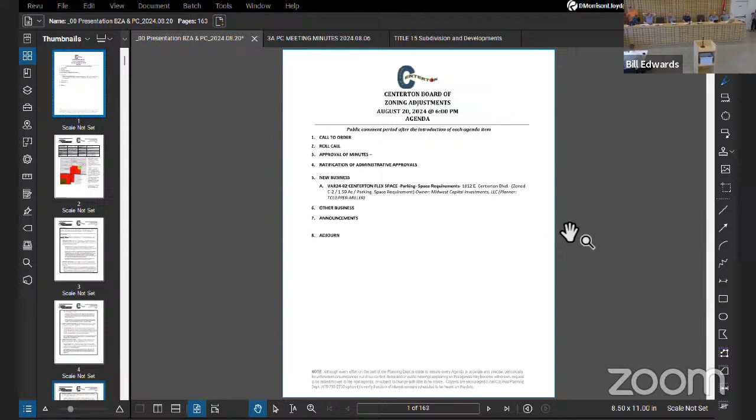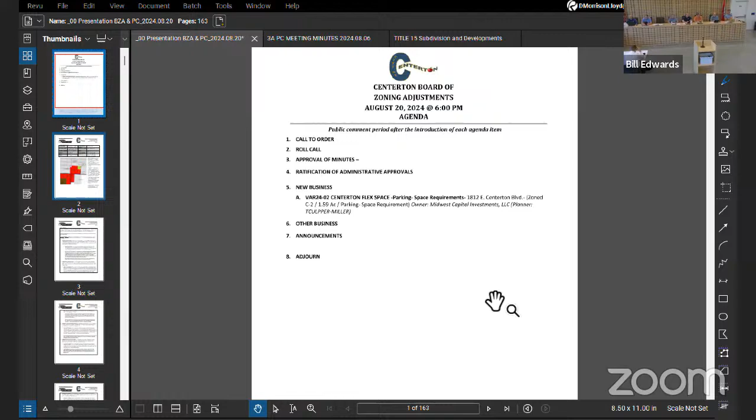All right, first thing on the agenda is a variance, 2402, for the Centerton Flex Space Parking Space Requirements at 1812 East Centerton Boulevard. It is zoned C2, 1.59 acres. Is the applicant here to give us an overview of what you're requesting?

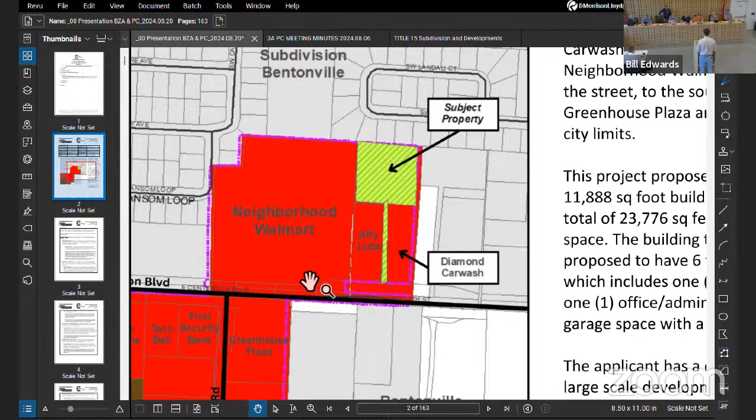It has several smaller units of about 2,000 square feet to be put out towards contractors and other small businesses. So the intended use is more of small contractors, be it HVAC people, pest control, those types of things, where they have a small space to store things and pick up materials and head out to the job site. So that's more of our intended use. The east side building has the smaller subdivided units of about 2,000 square feet each, and the western building is just a shell that's a little under 12,000 square feet.

So what we're requesting is a parking variance to reduce the amount of parking. The code has two different parking calculations: one of which is one space for every two employees, and the other calculation is one space per 500 square feet of building, and it says whichever is greater. So our request is for the lesser calculation there.

If we calculate the buildings, it would need about 48 parking spaces for the greater requirement. We're providing 36 spaces on the exterior. These buildings also have roll-up doors for a garage space inside the building. If we're able to count those roll-up doors with the spaces inside the building, that provides an additional 12 spots, which gets us to the 48 on the larger calculation. So that's what we're requesting: either count the interior parking spaces, which gets us to the higher count of 48, or let us go with the lesser count for the one space per every 2 employees.

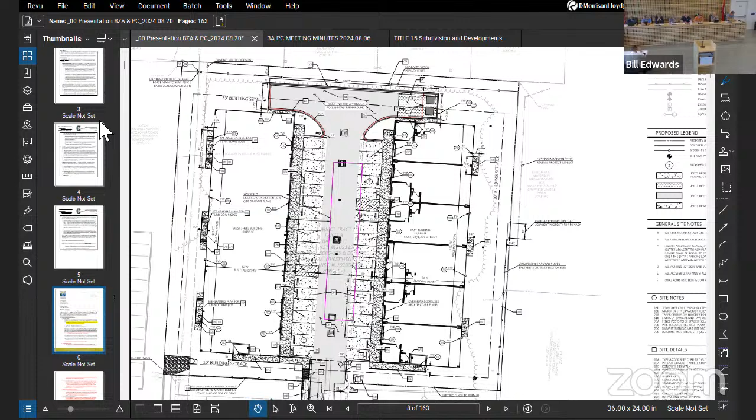This project proposes two 11,888 square foot buildings for a total of 23,776 square feet of flex space. The building to the east is proposed to have 6 tenant spaces, which includes 1 bathroom, 1 office space/admin space, and a garage space with a bay door.

The building to the west is currently just a shell with 6 bay doors and is being built out for the tenants. The applicant has a concurrent large-scale development application, Development 2403, that is pending approval contingent on the approval of the parking reduction variance. They are requesting a reduction of 12 parking spaces from the required 48, down to 36.

Would you like me to go over the findings or do that after public? I'll cover the findings. Any questions or comments from any of the commissioners before we open it up to the public?

I would then entertain a motion to open the public hearing. Mr. Jerry: I make a motion to open public hearing. Second. Motion to open the public hearing. Is anyone opposed? We are now open to the public.

If anyone wishes to speak, have any questions, comments, concerns in regards to the variance request for a reduction of parking spaces at 1812 East Centerton Boulevard, we ask that you come to the podium, state your name and address, and any questions, comments, or concerns.

Second call for anyone who wishes to speak. And third and final call. This is Joey, I'll make a motion to close the public hearing. Motion to close the public hearing and a second. Is anyone opposed?

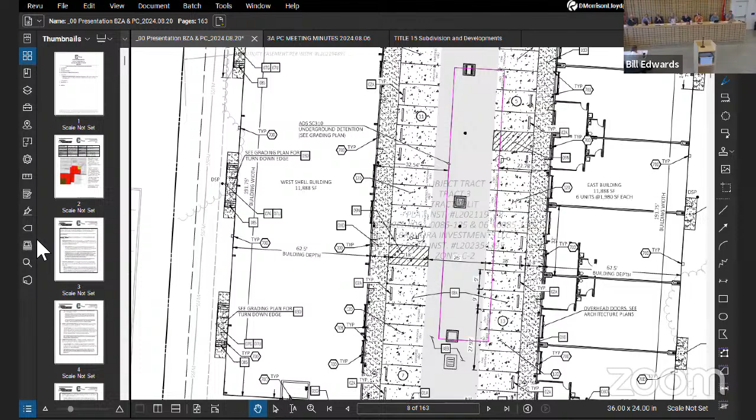Any questions or comments before we go through the fact finding things we need to consider? The first one is preservation of intent: that the variance, if granted, is consistent with the purpose and intent of the regulations for the district in which development is located. No variance shall have the effect of permitting a use in any district that is not a stated permitted use, accessory use, or conditional use of that particular district.

The applicant's response: the variance meets and exceeds the lesser of the two parking requirements in the warehousing and wholesaling parking section. In addition, the buildings have 6 roll-up doors each, which can provide an additional 12 interior parking spaces for vehicles to meet the 48 space requirement of 1 space per 500 square feet.

The staff findings: the intent of the C2 zoning district is to allow for appropriate parking for highway commercial uses. Flex space is typically used for warehousing and wholesaling, and Centerton code requires at least 1 parking space for every 500 square feet of floor area, or 1 for each 2 employees, whichever is greater. Centerton code for retail uses requires 1 space per 200 square feet. Due to this being zoned C2, a retail type business could locate in this development.

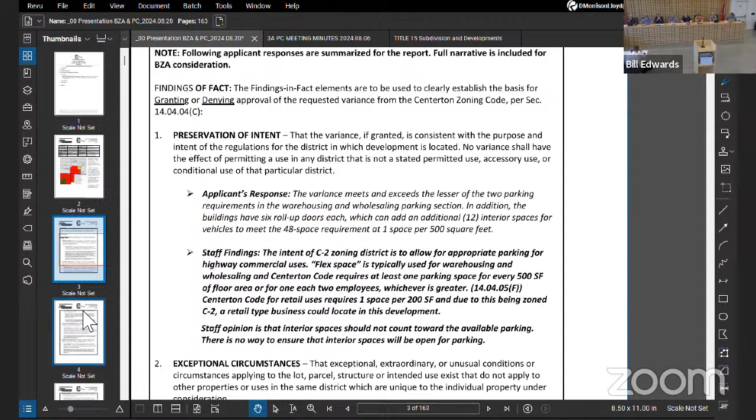So what's the requirement for that code based on their layout, and what's the requirement for the 200? How many parking stalls do they need to meet each code? Is that on here? Yeah, the one per 500 square feet is 48 parking spaces. Okay, then the lesser is the 36.

The one per 2, is that asking about the retail? We have no idea how many employees. Right, so it's based on square footage. And that's 36.

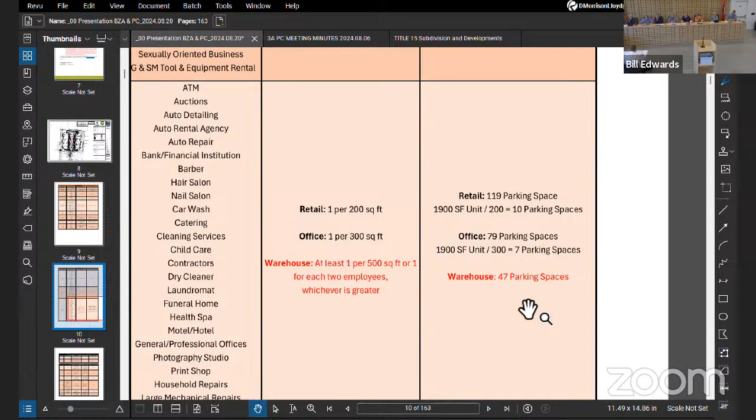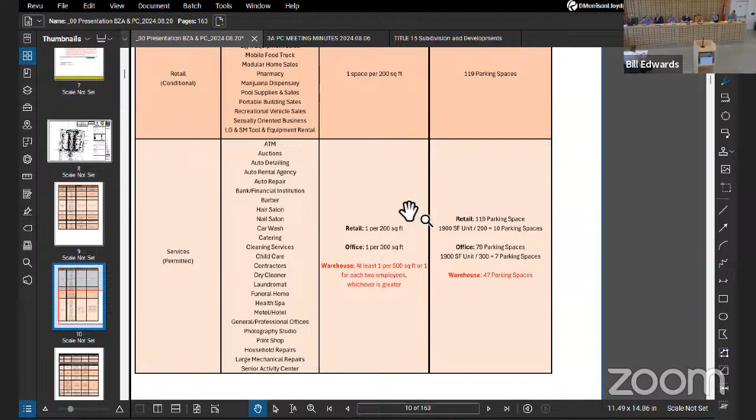That's what we've done on other flex space. On some, we've looked at even where they already have office space identified. So we've done one per 300 on that space, then one per 500 on the warehouse space. And Tara's gone through and created a list so you can see those uses.

That's what we considered when we were looking at the findings. Well, their response says they exceed the lesser of the two. But the code says you have to do the greater. There's no lesser. This is what they're asking. Well, they're asking for the lesser of, but the code states the greater.

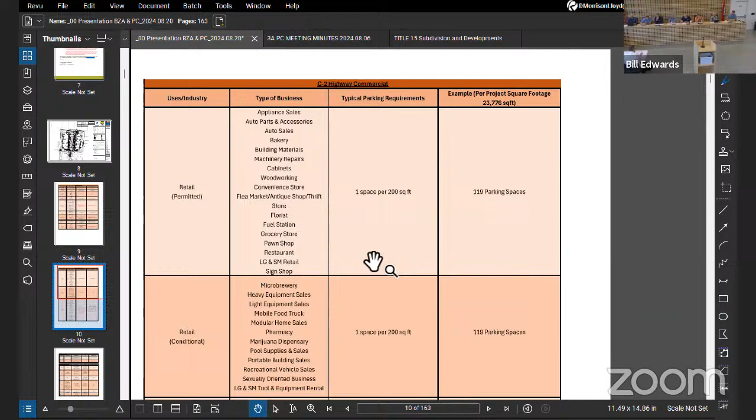Or if the interior spaces could be counted toward that amount. Okay, but they're not sprinklered, right?

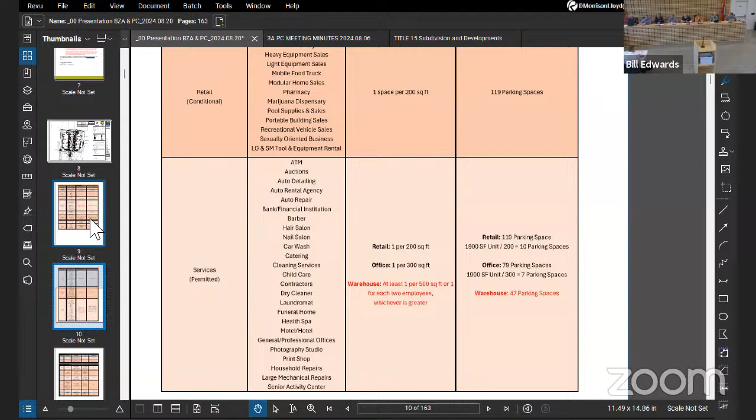It's zone C2. Have there been any other conditions put on it as far as what it is limited to? Because they're asking for flex space, but with that, would they be allowed to do what is permitted in C2 at any time? Any conditional use they would want in there, they would have to come and request that through a conditional use permit.

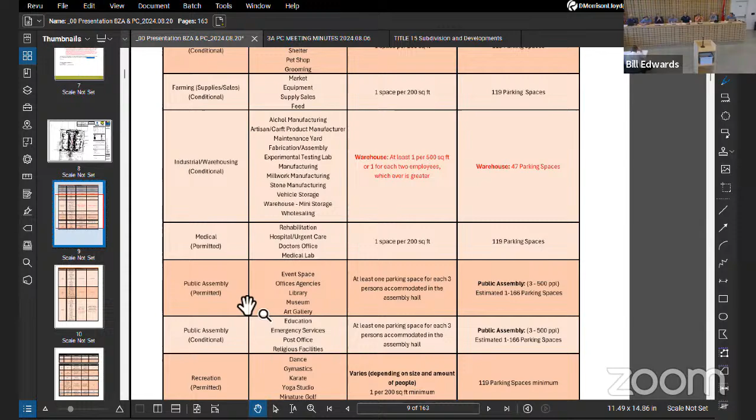So that's why those are broken out. You can see the permitted uses, and those would be allowed without question. They would not have to come back to us to do those, but they would have to meet fire code, building code, and so forth when they built them out for that specific purpose.

Tara went through and put everything on there, but I did pull out a few things, like a golf course or an airport, things that clearly they wouldn't be using them for.

There may be some other things on here that wouldn't be applicable, but would they be able to talk to the neighbors about a shared parking agreement?

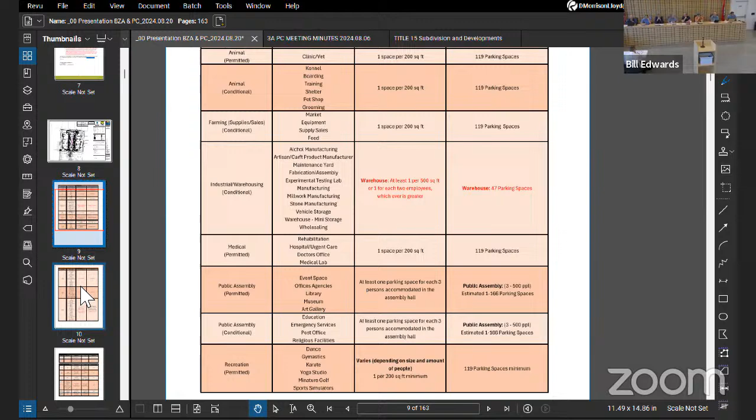There is not, but there's the car wash. Right, probably not a lot of opportunity there. They really don't have any spare capacity.

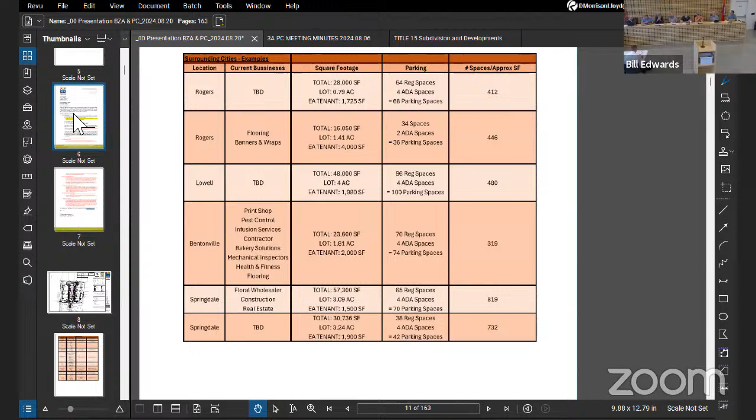What are your thoughts around allowing the inside parking? Maybe we'll start there. I don't see that, because the building had to be open for somebody to go in and out. The doors couldn't be locked in order for them to use that parking.

I think if you look at all the uses permitted in C2, there may come a time where indoor parking is not part of that use. I don't think so either. And now you've taken away that parking spot, but you're still allowed by code to use it as something else inside there.

But technically it's all to code. That doesn't mean at that point, because they had a variance. No, but I'm saying there's nothing stopping them from using the interior space as a parking space. No.

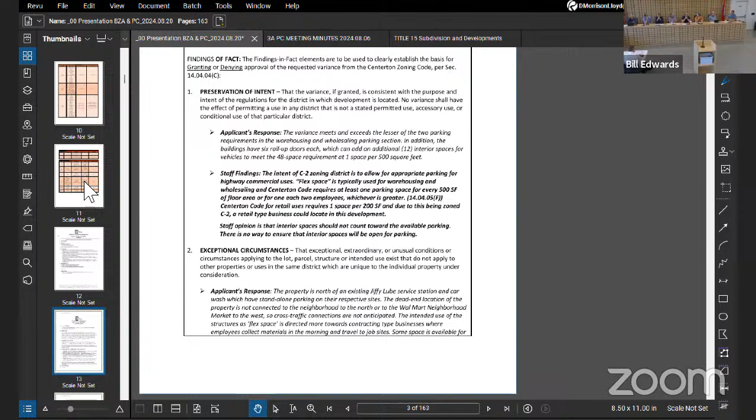How do you police that? I mean, if you don't sprinkler it and somebody comes in and wants to start putting commercial vehicles in there, you're not suddenly going to go out and sprinkler it, or come here and tell the fire department, hey, FYI. I mean, how do you police it?

You can get their certificate. I'm just thinking for safety purposes, and we have other businesses right next to it. Yeah, and I always have to remind us, our job's not to be the police, but you have to think about it. I think their intent is more around regular vehicles because of the regulation of the numbers.

So I think they're really talking more about just everyday use. Do we want to allow them to count? That's what I think we need to consider, more than getting into the technical details, do we want to allow them to use it? We want to allow them to count 12 spaces. I don't think so. If it's a warehouse use, then you're not going to fill up a warehouse with a truck.

I think what we need to think about is if they fill the others up with businesses that would require more than the 36 parking spaces, then according to the code, those people wouldn't have any place to park necessarily.

That's what we're saying we need to think about. Turn that into a gym, which you could under C2. 30 parking spots for a gym ain't gonna work.

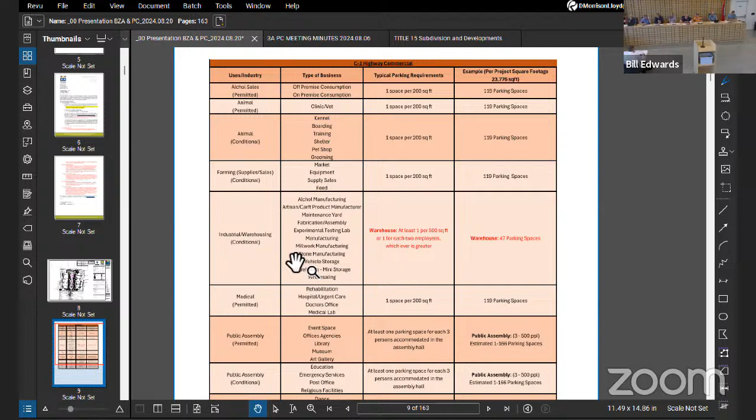That's question 3. We're gonna get there in a second, Tony, we're gonna get there in a second.

I'm not a fan of allowing the indoors to count towards their numbers.

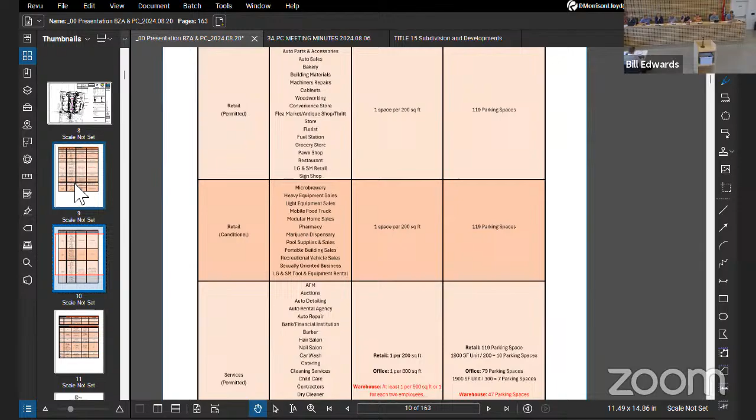In the preservation of intent, I guess we don't normally talk about parking spaces. I was just reading back through it to figure out if we can make any real use out of it, and it's a little difficult on parking, in my opinion as well. I think we can have that discussion, we can talk about it.

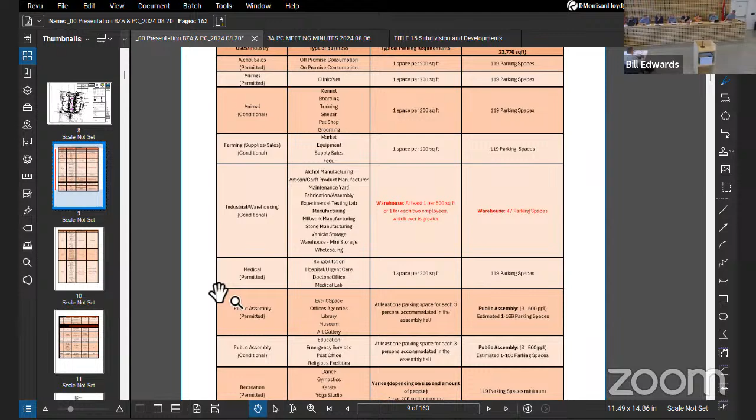I think we're gonna get into a little bit more, but I think our biggest thing is to decide whether we want to allow them to use the 2 or the 12 inside. I think I heard a majority say no.

So I don't think there's a proven point here with the preservation of intent, trying to do something other than the required parking spaces. I guess is the way that I would say it. Would you guys agree with that, or do you have a different opinion?

Agreed. Okay, so I'm gonna go on to the next one.

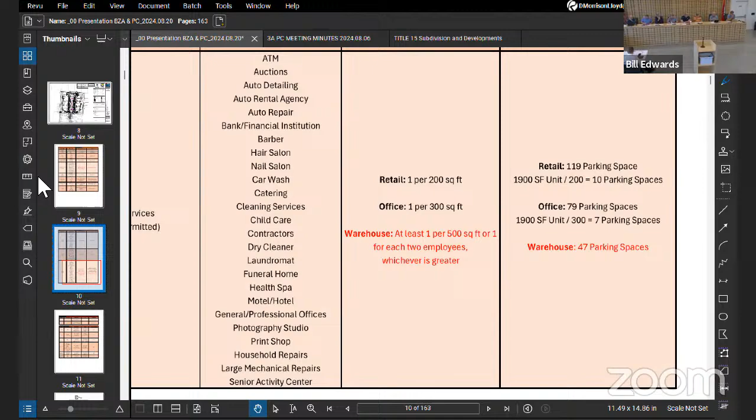Exceptional circumstances: exceptional, extraordinary, or unusual conditions or circumstances applying to the lot, parcel, structure, or intended use that do not apply to other properties or uses in the same district, which are unique to the individual property under consideration. The applicant's response: the property is north of an existing Jiffy Lube service station and car wash, which have standalone parking on their respective sites.

The dead-end location of the property is not connected to the neighborhood to the north or to the Walmart neighborhood market to the west, so cross-traffic connections are not anticipated. The intended use of the structures as flex space is directed more towards contracting type businesses where employees collect materials in the morning and travel to job sites.

Some space is available for offices and showrooms. The buildings are not anticipated to be major traffic generators, which is more typical of C2 zoning. The staff findings: without meeting the minimum requirement of 1 per 500 square feet for uses stated above, staff does not feel there will be sufficient parking for work vehicles and/or personal vehicles.

Insufficient parking would lead to people parking in grass, fire lane, and access drives. The parcel does not have an exceptional or extraordinary circumstance that would affect the intended use and parking requirements. Other developments of proposed flex space were required to meet the 1 per 500 square foot parking requirement.

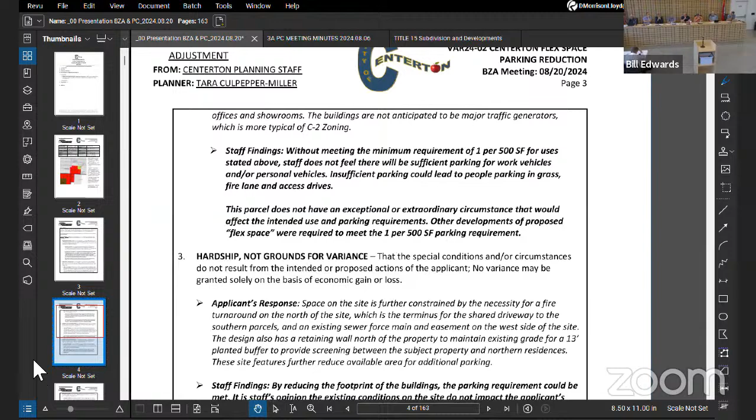I'm just looking for where warehousing really falls in the use. Is that this zoning, or is that a different zoning? Well, on flex space, we typically have considered them as warehouse type because they have the bay door, they have deliveries.

So that is the most appropriate parking. I'm talking about the zoning though. Is warehousing more industrial or commercial by our code? It is more industrial, as being allowed. But with the flex space, they are limited to the commercial use.

Gotcha. But we're taking the 500 - we know why it's 500, from the warehouse going 1 per 300 square feet. The cost of building flex space is becoming more and more popular for commercial use, not necessarily industrial use.

Especially where we live, because we don't have enough of it.

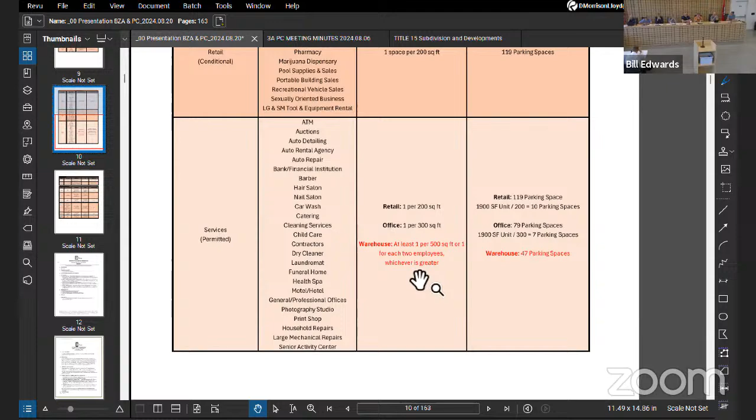We also, and Tara did prepare a table of what other cities or developments in other cities worked out to per square footage, parking spaces per square footage. Springdale was much higher on those, but Rogers, Lowell, and Bentonville are all around 300 to 500. The 36 that they're asking for is somewhere around 650, if you want to compare numbers.

I was looking at the size, I did that square footage about 10 minutes ago. I was looking at square foot size. You said about 25,000 square feet, it's 23. So I was looking at the 23 and then the 23.8, almost 24. We've all looked at that a whole lot today.

So, sorry, but I was just curious about that. I don't think there's any exceptional circumstances related to that. Agreed. Okay, I would like to add that Rogers has recently waived their parking requirements and has put it on the developer to provide enough parking for their intended use as the owner and developer. Agreed, unfortunately that's a different conversation than the variance.

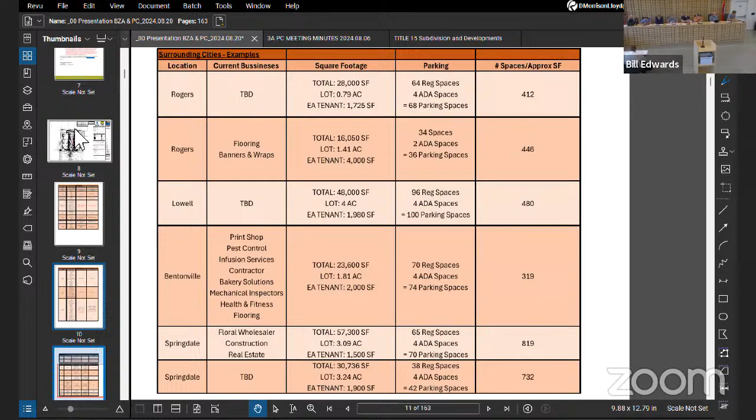The third thing to consider is hardship - not grounds for variance - that the special conditions and/or circumstances do not result from the intended or proposed actions of the applicant. No variance may be granted solely on the basis of economic gain or loss. The applicant's response: space on the site is further constrained by the necessity for a fire turnaround on the north of the site, which is the terminus for shared driveway to the southern parcels, and an existing sewer force main and easement on the west side of the site.

The design also has a retaining wall north of the property to maintain existing grade for a 13-foot planted buffer to provide screening between the subject property and the northern residences. These site features further reduce available area for additional parking. The staff findings: by reducing the footprint of the buildings, the parking requirement could be met. It's the staff's opinion the existing conditions on the site do not impact the applicant's ability to meet the parking requirements.

This is probably another one of those where I would agree with staff as well, but I will open it up for you guys for discussion. Yeah, I didn't see on the drawing where the design was limited - it couldn't be adjusted so far as square foot size. There's an existing utility easement here, the force main, you could park over that, but you're picking up 2 spots extending that hammerhead. That's not gonna get you close. And then back here is a retaining wall and a privacy fence, and they have drainage here.

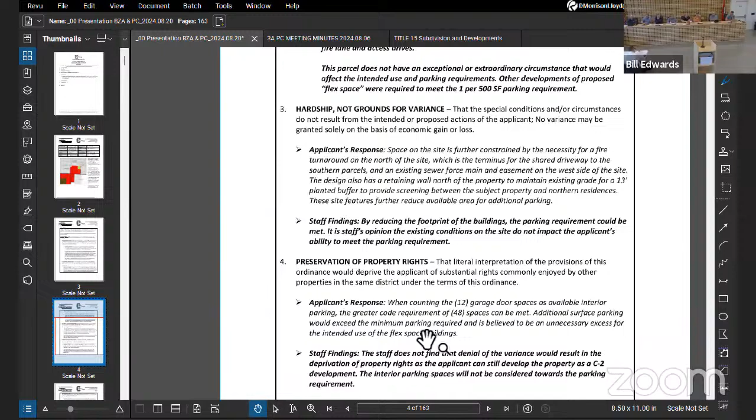Preservation of property rights: that literal interpretation of the provisions of this ordinance would deprive the applicant of substantial rights commonly enjoyed by other properties in the same district under the terms of this ordinance. The applicant's response: when counting the 12 garage door spaces as available interior parking, the greater code requirement of 48 spaces can be met. Additional surface parking would exceed the minimum parking required and is believed to be an unnecessary excess for the intended use of flex space buildings. The staff findings: the staff does not find that denial of this variance would result in the deprivation of property rights, as the applicant can still develop the property as a C2 development. The interior parking spaces will not be considered toward the parking requirement.

And again, I would lean towards staff's findings here, but open it up to the commissioners for any additional discussion or disagreement. But I mean, it sounds like we've asked for 500 on everything. Yep.

The last thing for us to consider is the absence of detriment - that granting the variance requested will not create substantial detriment to adjacent property or that will materially impair or be contrary to the purpose and spirit of the chapter or the public interest.

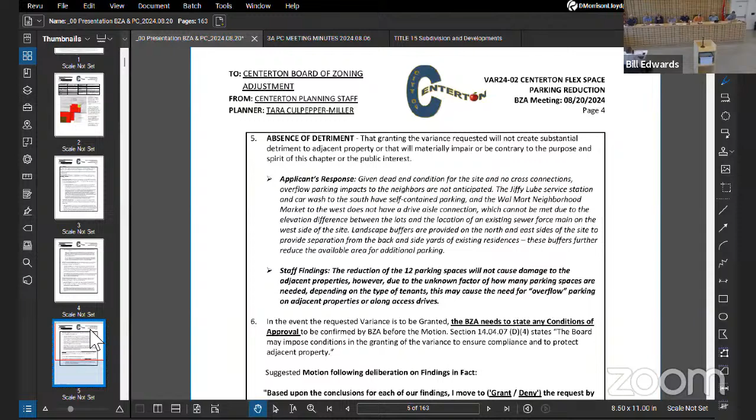And we'll have another meeting next time just to go through the minutes. And I would entertain a motion to adjourn the Board of Zoning Adjustments.

Joey, I'll make a motion to close the meeting for the August 2024 Centerton Board of Zoning Adjustment. Motion and a second. Is anyone opposed? All right.

Next is the Centerton Planning Commission for August 20th, 2024, and I will call that to order with a roll call. Brandon Swoboda, here. Ben Lewis. Tony Davis. Ron Sessoms. Harry Harris. Rick Inkler, here. Kevin Murphy, here. Joey Engel, here. Jeff Safer, here as well.

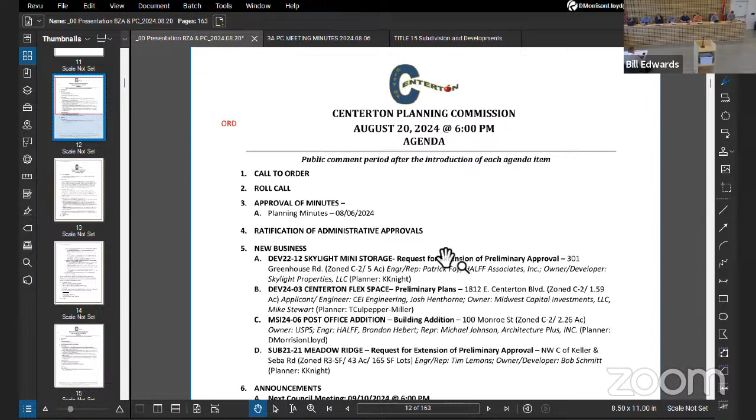First thing on the agenda this evening is the approval of the minutes from our meeting of 8/6/2024. On a motion to approve the minutes from 8/6/24. Second. Motion and a second. Is anyone opposed?

All right, no admin approvals this time. First thing under new business is the development 2212 Skylight Mini Storage request for extension of their preliminary approval. It is 301 Greenhouse Road. It is zoned C2, and it's 5 acres. Applicant, give us a quick rundown of what happened and what you're requesting.

Yes, sir. Patrick Floyd with HALFF Associates. I'm here on behalf of Skylight Storage. This was approved right around a year ago, right around ending the first sewer moratorium, which caused some delays. Whenever that got released from the health department, we got that approval. The client went to get the financials in order and it wasn't making sense yet. So since then, he's finally got it ready to move forward. He's got S&K on board. We didn't need to ask this extension before, so before you guys now for that extension, 6 months, I believe that gives us time to do grading permits and gets to construction.

Caleb, would you want to give us a staff overview? Yes, so this parcel does have a conditional use for storage.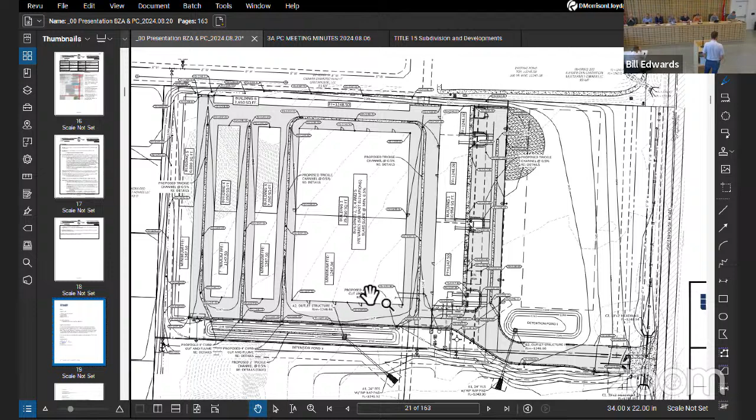However, no construction has taken place on site since that meeting was held. They haven't submitted a grading permit or had their P&P inspections to begin work on site. The developer has stated that construction has not begun due to a scheduling conflict with the contractor. They are requesting a 6-month extension for preliminary approval.

I'm happy to go back through the details of the project if you guys need a refresher. Shouldn't be anything new that we would need to reconsider on this. No, they're meeting everything. Their adjacent street agreement is signed in the packet. So this one was good to go. They just didn't start construction.

Grading permit constitutes as starting construction, right? No, not here. We have a subdivision that has a grading permit and it's not even, it is just now finishing up addressing comments from staff. But if they haven't approved large scale and pull a grading permit, that doesn't constitute as starting construction? They have to have a pre-con and be released.

Do they need another pre-con? Nothing is changing on their IFC, so I would imagine no. It all depends how much longer it's gonna be till they start and if there's any changes. Okay, kind of how we make it. Sounds like talk to Rain before you want to start.

Is 6 months good? Patrick, I'm asking, I'm sorry. That was the request, so. I think the Skylight Storage, they said 6 months was gonna be plenty. Okay, I've seen emails to S&K and they're geared up to put the BMPs in place and move forward, so.

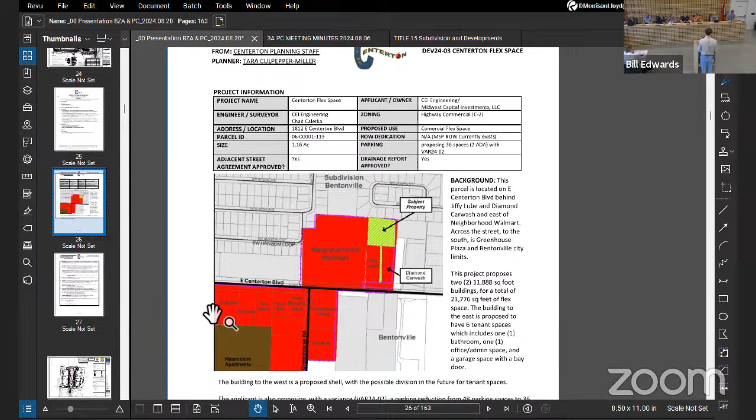Is there anything else that you guys need to discuss? I don't think so, but we can walk through the plans if there's any for staff. There were minimal staff, but if you just walk us through what you guys were thinking and maybe there's some way to be creative. How's that?

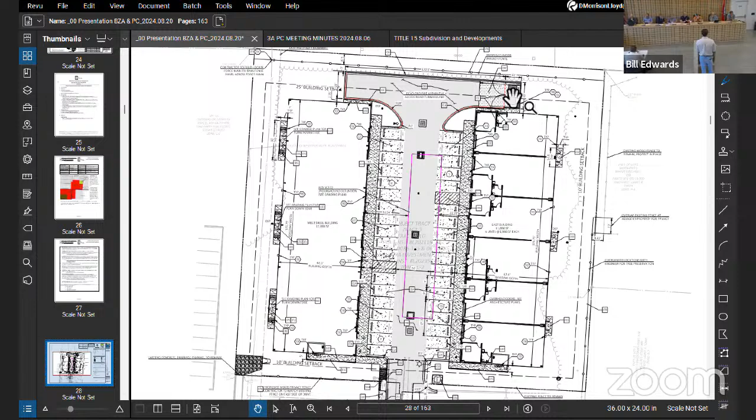So the project is fairly straightforward. The buildings are on either side, with a drive aisle in the middle, and a turnaround on the north side. Dumpster access is on the north side, so it's screened. The detention is underground under the parking area, so that's probably the most atypical thing you see in the site plan.

It's the magenta rectangle that you see there. So that would collect the roof water and the parking lot water and discharge at the southwest corner of the site. There's an existing drainage ditch and shared drainage easement for these three properties. We would tie in there.

We're trying to keep existing trees along the east side and the north side by the residences, so we're limiting grading there.

Can you tell me what the difference in the buildings are? These look split over here. That one doesn't show any interior walls. What's the thought on that?

So the eastern building will be subdivided into 2,000 square foot units. And the western building is a shell, so if there's one larger tenant, or if they want to further split it up.

Is there any thought to reducing the footprint of that larger building since it doesn't have any interior limitations? It would free up some space with reduction of square footage, and it also frees up space to have more parking around. Economically, it challenges the project to lose additional square footage.

We did seek a shared detention pond with the neighbors, which was denied. So that's why we went underground with the detention. I will tell you, a typical comment is that's a lot of parking spaces in a row without an island. But that's not gonna help your case.

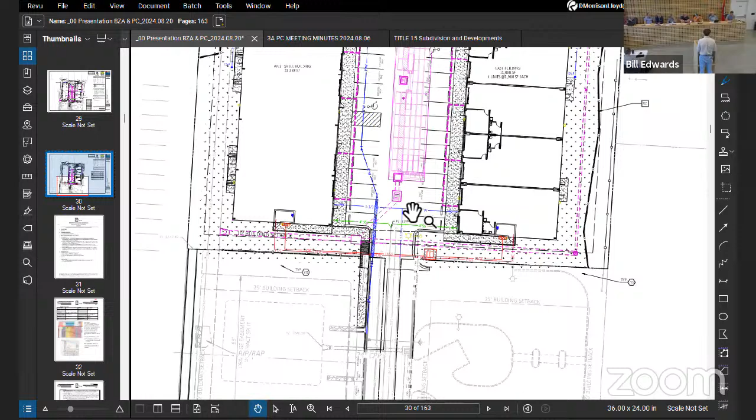That's a, I get it. Typically, you would reach out for some shared parking, but those type of businesses in front, you can't. Let me ask a question, and without even talking to fire first, I don't know - if the buildings are sprinkled, would anybody entertain interior spots? I don't know that that really changes a lot of people's opinions, but I'm just asking. If they all get filled up, then there's not 12 parking spaces available.

I was stuck on the intent - that it being C2, just because you intend to park in there now doesn't mean you can in the future.

Are there any other questions or concerns from the commission? Site plan - I don't have any, no. Sarah, did you want to just take us through real quick, just so we, in case something triggers our thoughts?

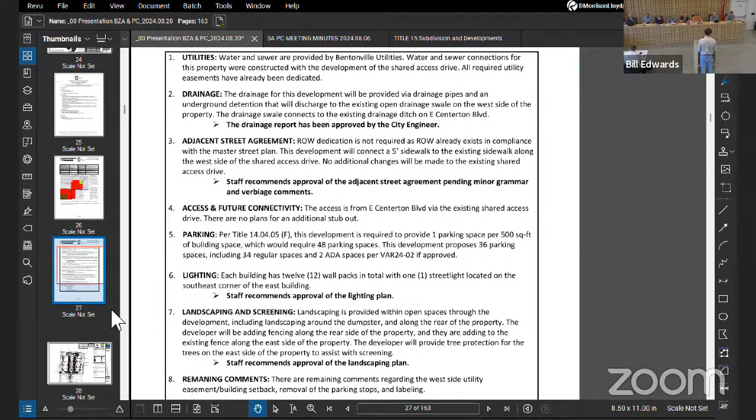The proposed use is commercial flex space. There's not gonna be any right-of-way dedication because it already exists. The parking is with the variance for 36 spaces plus 2 ADA spaces, variance 2402. The drainage report has been approved and the adjacent street agreement has also been approved. The parcel is located on East Centerton Boulevard, behind the Jiffy Lube and Diamond Car Wash and east of the neighborhood Walmart. Across the street to the south is the Greenhouse Plaza and the Bentonville city limits.

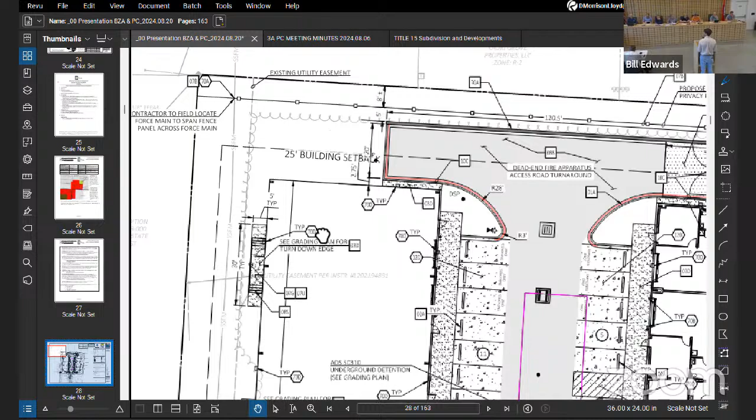Currently, the project is proposing two 11,888 square foot buildings for a total of 23,776 square feet of flex space. The building to the east is proposed with 6 tenant spaces, which includes 1 bathroom, 1 office, an admin space, and a garage space with a bay door. Currently, the building to the west is a proposed shell with possible division in the future for tenant spaces. The applicant is also proposing the variance we went through for the parking reduction from 48 parking spaces to 36 parking spaces with 2 ADA spaces.

Would you like me to continue to staff findings? No, they look pretty straightforward.

Are the trees in the rear enough for screening? Well, I see a lot of shrubs too. I don't know how tall they get, but - there's a wall back there? For height, there is a wall. Which way is the wall going? There's a - down or up?

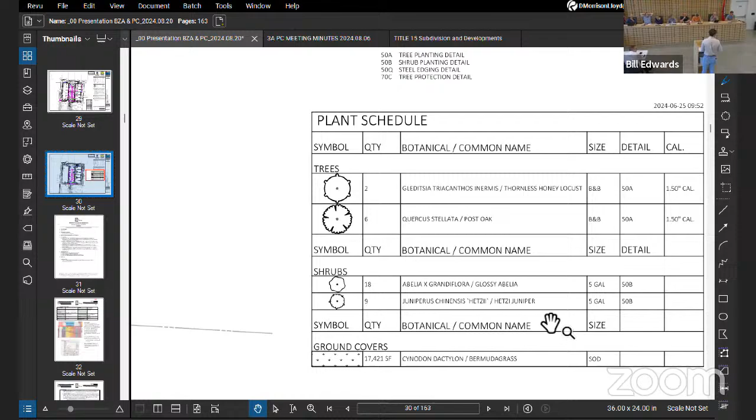The properties to the north are much higher, so it's going up. We'll have a 6-foot privacy fence. There's an existing tree line. Yeah, we have taller shrubs in front, yeah. How high is the wall? It's about, I don't recall, it's about 3 feet, plus or minus.

The whole site behind is 5 feet higher, yeah, on the area. And how high are the shrubs? It doesn't say on the plans, though.

That might be something to look into, just the screening requirements on the rear. I know the trees are good, but they are a taller screening shrub.

Also to the west is the Walmart parking lot. To the east, that's undeveloped right now. We're trying to limit grading close to those existing trees to keep those.

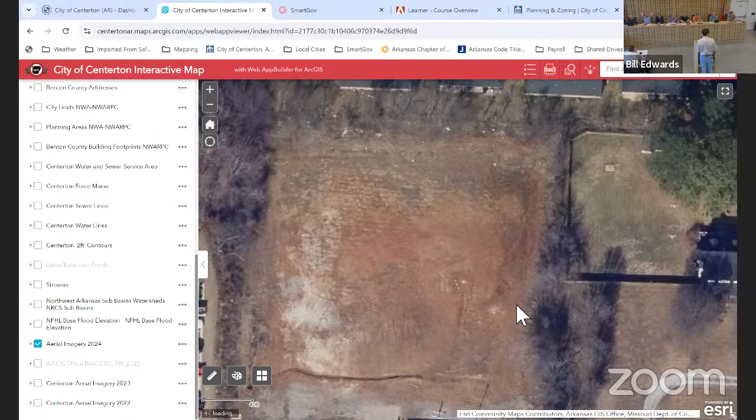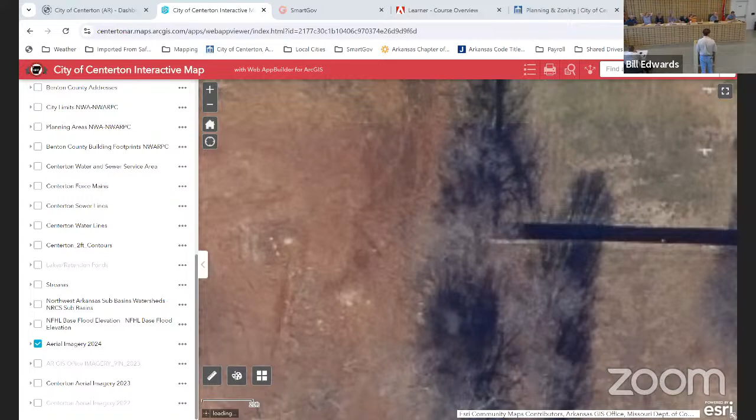Okay, and then there's that residence to the east where you can see the fence line. Yeah, can you just show them the trees that you're keeping on the east? Are they on here? I didn't see them sticking out. What we have is the outline of the canopy. Gotcha, they're on the neighboring property.

Oh, then why are you limiting grading if they're on the neighbor's property? We're in the drip line of those trees. We do have a juniper. That's gonna count then? I don't think that counts for screening if they're on somebody else's property. We are adding a privacy fence there as well.

There's existing privacy fence on their site - the neighbors, it looks like. That's what I'm saying, so the fence they proposed overlaps. You've gotta maintain the screen with vegetation and trees - the trees are on the other side.

So there's existing screening for the existing use that's there. So if someone else comes and develops that, they know what's behind them - get them to do the screening at that point.

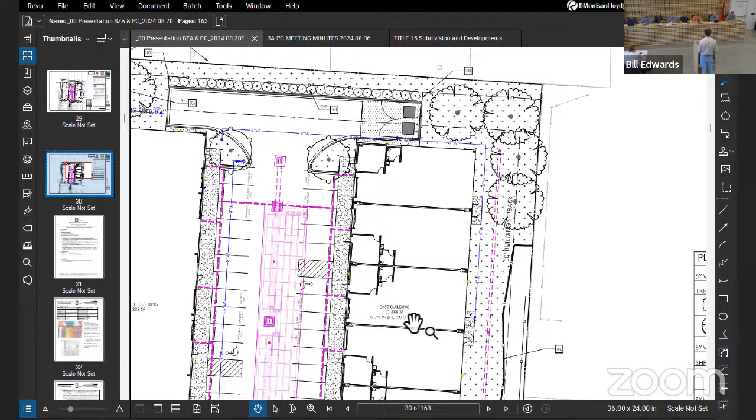You try to put, I don't have any other line, you can put on roof edges, it won't survive. Just trying to brainstorm on any parking. I'm still stuck on it. What if you took one of the retail shops on either end and used that for warehouse intent instead of retail intent? Does that change the 200, 500 parking number? That makes it worse, doesn't it? A lot worse. Warehouse is 1 for 500, retail is 1 for 200, so that makes it worse.

But you're no longer using the 200 square foot, you're swapping 500 for 200. We're on the 500 now. I thought we used 200 for the retail, 500 on all of it. There's no space defined, that's the problem. Okay.

Also, typically we require trees and parking lot islands. Yeah, that was my comment. Maybe that's where some of the flexibility comes in.

I still don't feel good about parking in a building. So on your staff findings, was islands not discussed here? When it was first submitted, they did not have enough parking spaces to warrant an additional island, because it was 10 parking spaces and there's an island at the end of the parking. But with the additional parking, it would be required. There's something to think about.

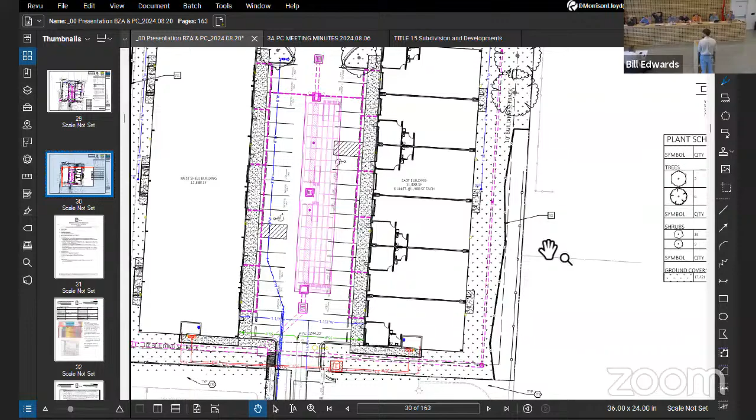I don't think counting neighbors' trees for screening is right. There's a fence there, right? They're putting in a fence - a 6 foot privacy fence and trees along that line. You said typically we require both, and the trees in discussion are the neighbors', which most likely won't survive. No, putting new ones in aren't going to survive if you put them in along that buffer at the end.

So are you over the landscaping? Good luck. Why am I confused, why would they not survive? The amount of sun they're going to get and competing for water underneath the other drip edge from the trees that are on the other side. Yeah, they're quite large, they're extending beyond where you'd be planting trees.

I'm more concerned about what the requirement is. If you're going to build in Centerton and the requirement is to have fencing and vegetation there, then you need to have that fencing and vegetation there. There's other species you can look at that would flourish. Again, consistency is what we need to have, and if that's what's required, then that's what's required.

Get a variance. So, I'd venture to guess you need to relook at your landscaping plan. That would be my recommendation. I agree. So I'd venture to guess we need to also question lighting.

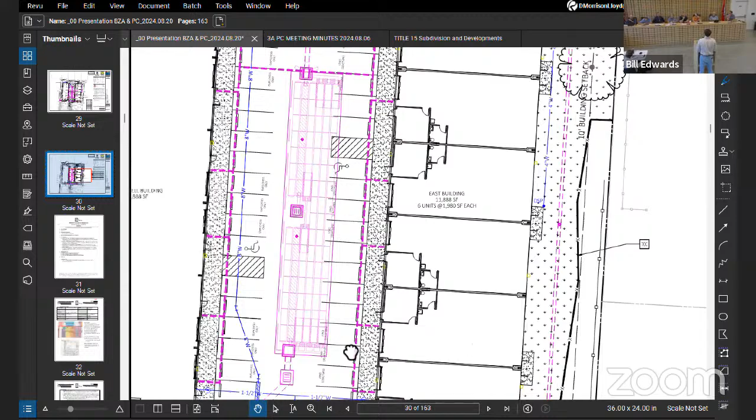Is staff pleased with lighting? It says we'll deal with it in the lighting plan. Yeah, they're wall packs on the building, they don't exceed past the property line into the residential. Excellent. There's no additional lighting on the side, there's one at the very front, the entrance. Is there a certain requirement for the number of parking spaces that requires a certain number of lights in order to illuminate those spaces?

Yeah, wish we had a good solution for you. Guess we'll see whenever it comes back. Do we need to table this? Yes, we should probably table it. I said I don't have to resubmit it. Alright, bye. Thank you, thank you.

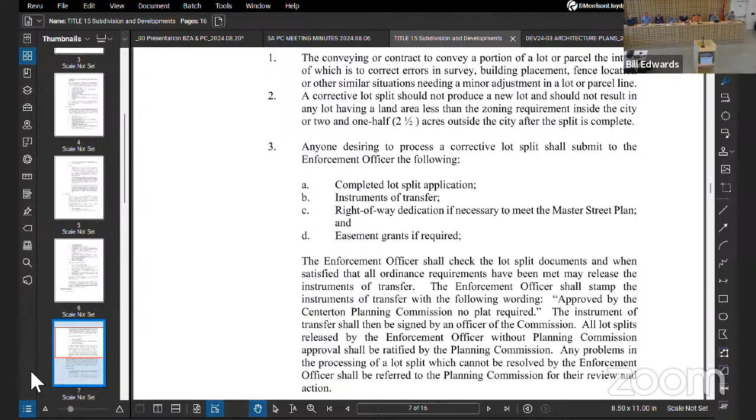So I'll entertain a motion to table development 2403. And I motion to table development 2403, Centerton Flex Place. Motion and a second to table. Is anyone opposed?

All right, next on the agenda is MSI 2406, Post Office Addition. They're requesting a building addition. It's at 100 Monroe Street, zoned C2, 2.26 acres. The post office owns it. The engineer applicant is here to give us an overview of what you guys are requesting.

Michael Johnson, architect, Architecture Plus out of Fort Smith, summed it up, in addition to the post office.

Diane, get to the site plan. All right, they are proposing to add 1,672 square feet of additional workspace on the north side of the existing post office, so it would be right here in this area. The existing post office is 4,260 square feet, and it was constructed in 2009. With the continued growth of the area, they need some more space for workspace. This will not be open to the public. It would be for mail sorting and those type of things.

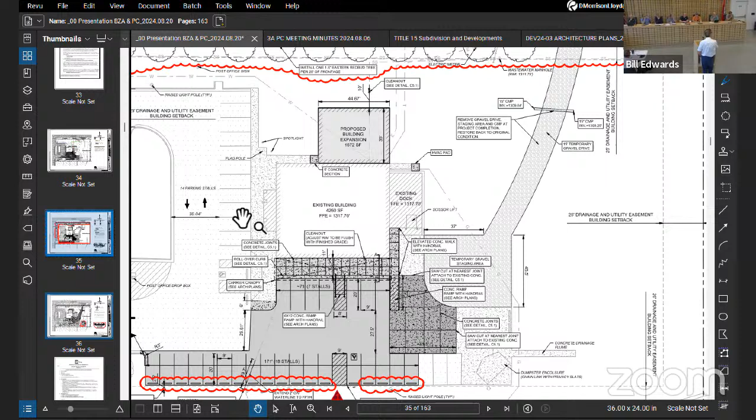The existing public access will remain open even as the temporary construction continues on the project. The access will remain the same. They are adding an additional temporary construction access on this side so as not to hinder any of the current post office traffic and work. And it is a federal project, so any adherence to the comments we've had is done in good faith on their part and not required.

But they are adding - we're not getting islands for parking. I tried, I said no, post office isn't doing it. So it was tried, but they are adding trees here along Monroe Street that do not exist currently, and they're adding street trees here along Centerton Boulevard. Also, there's one that'll need to be moved because there's a box there in the way.

It appears that only - I don't know what happened to my 40 feet of existing right of way for Centerton Boulevard exists - so they will need to do like another 10 feet. And I have asked them in my most recent set of comments if they could please show where that right of way line is and then shift things as necessary.

And of course, the highway department is to be widening this section of Centerton Boulevard, hopefully in the very near future, we're hoping by 2026. Fingers crossed over here. They will be installing a 6-foot sidewalk on the west side of Centerton Boulevard, and that might have to be coordinated with the post office and with the highway department widening.

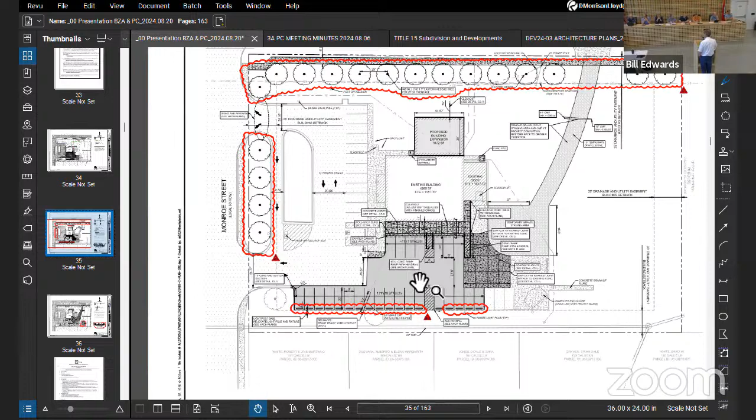The trash enclosure, they are not proposing any changes at this time. It is currently chain link with privacy slats. So I don't know if you guys would like to request that the privacy slats be replaced. That is something that's kind of up to you guys to decide, because they're not wanting any changes on that right now.

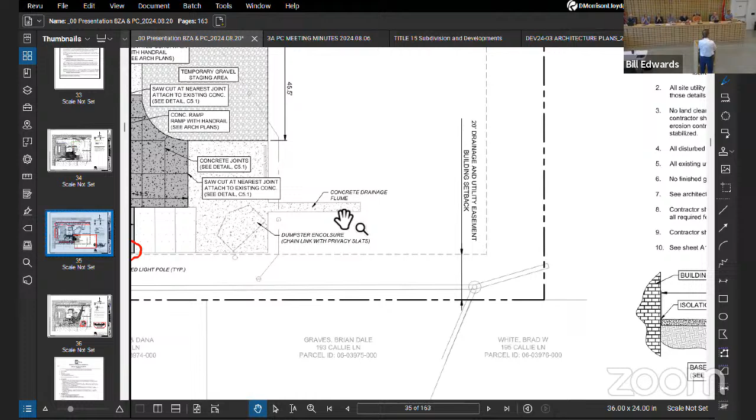And like I said, with the landscaping, they are adding trees. They are moving some light poles around, but they still don't have any issues with light pollution, all contained to their site. And the drainage - there's actually a pond located just to the east of the property. And Alan has requested that they add a little drainage sediment basin, and they have agreed to do that, and Alan has approved that change to the detention.

Questions or comments from any of the commissioners? I got three, all right.

For our parking, what's the space maximum before an island? I don't think it's specifically called out, we don't have a code requirement for it. Right, but we can implement landscape policy. They were asked to do one per ten. I think that's fair. So what's the rationale on green space islands in the parking? Maintenance, and potential danger to their vehicles. Really? Okay, so I would like to see that again to maintain consistency.

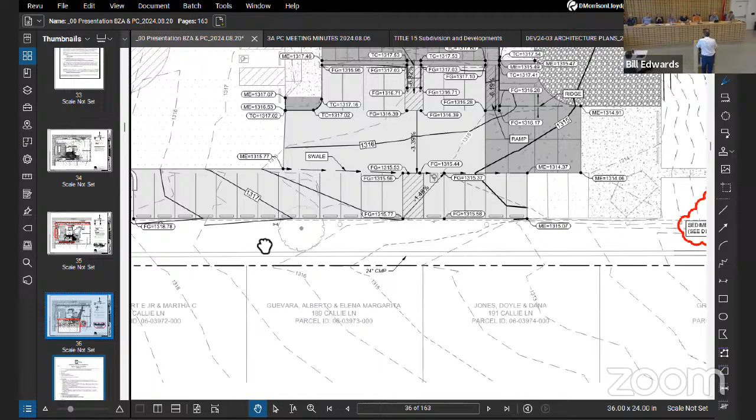And then we don't have any trees along this southern boundary where we are adjacent to the residential development here. Great job on the north, that looks awesome, and the west there along Monroe. I think it would be prudent to ask for some landscaping to the south against the residential. And then that begs the question on the dumpster too - do we have any pictures of what that looks like currently?

No, I could pull up an aerial. I thought our code required... you got a picture? Okay, prepared. It does. Also, the sidewalk on the south - yeah, for sure, it's all put together. Functional.

Sorry, what was that? Walk on the outside is supposed to be a 10-foot sidewalk. Is that what's proposed? It's 6 here. South side is supposed to be 2, 10 foot on that south side.

So what's up with - do we have any sort of preliminary design from ArDOT? We do, yes. Are they at 50%? Are they obtaining right of way? I believe they will when they get to it. I'd say they've pushed this all the way to the 27 letting, so it's not starting anytime recent. They have to work on getting all the right of ways and then all the utility relocations, which are substantial.

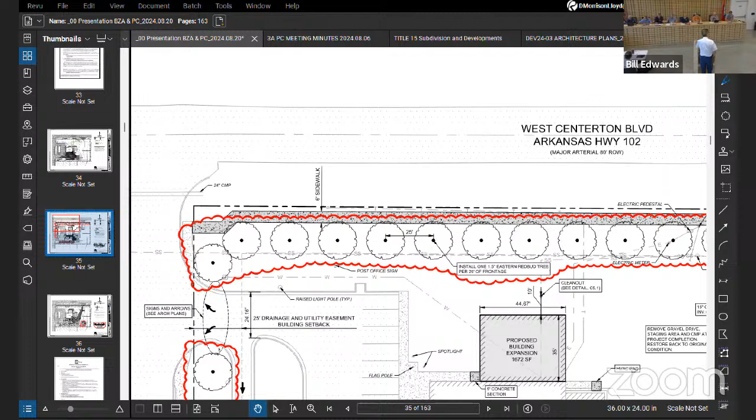Can we move the customer service desk just a little bit? That line gets long. And the gravel staging, is that just temporary for construction? It's construction plus they still have to deliver. And that south side parking lot, in essence, is gonna go away for a period of time because of having to regrade it. So they still have to figure out a way to bring their vehicles in, and the intent is to keep them separate from the customer. Sure, yeah, but at the end of the project, when it's completed, it goes away, it's all grass again.

See those big trees right there? Well, those four on the left and the one right by that white car - are a lot counted? Doesn't count it, but that whole row right there, there's a whole row from that orange car down that is not counted, so.

Some of those trees might go away, you might keep a couple. Yeah, all those right there. Okay, 3 trees - those will all be staying.

It looks like there's nothing there on the plan, so that's why I was discussing that. Gotcha.

I think the dumpster's okay. It's one of the better ones that I've seen, so I just want to give you that option. I understand - it's actually presentable and looks good.

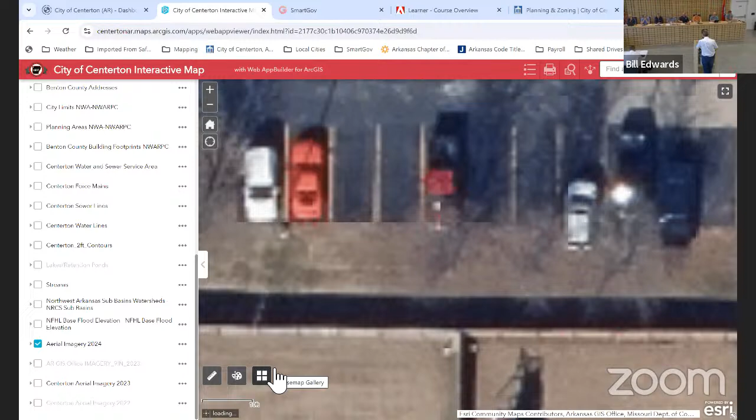I went by there today, I didn't even notice it, so it's federal funding. Where is it? Right here. Kind of shut that off. Well, that's fine, it's right here. Any other questions or comments?

Everybody out on the island, is it just me? I think you're on the island, man.

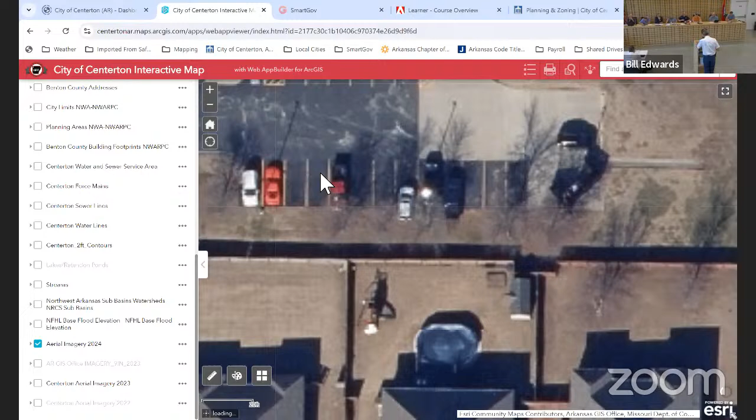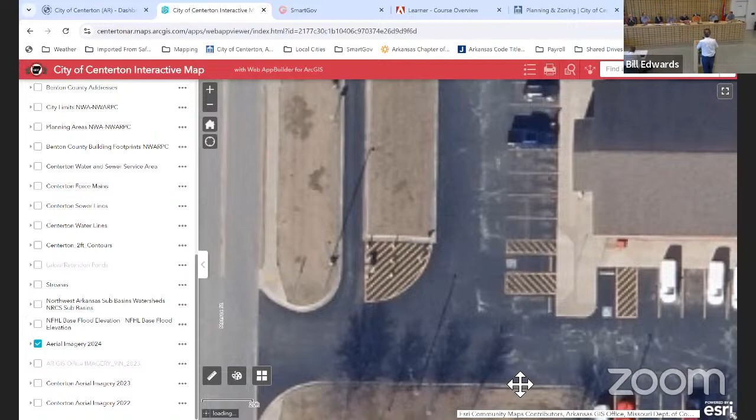I didn't understand why you were so quick to say no to it. I was just curious why, when you were asking. I mean, is it not a maintained code requirement? It's that it's a federal project, so they decide whether they're going to adhere or not.

Did we decide whether they get a CO or not? No, we don't - Building doesn't even. Yeah, I mean, I was hesitant. I mean, I want my...

It's an island, because you've got a row of them. They see those as two - again, maintenance and also potential, if there are storms, they see them as potentially damaging to the building and/or vehicles. It's a big tree if it hits your building. Again, you've got to remember, they park a lot of vehicles - those mail vehicles.

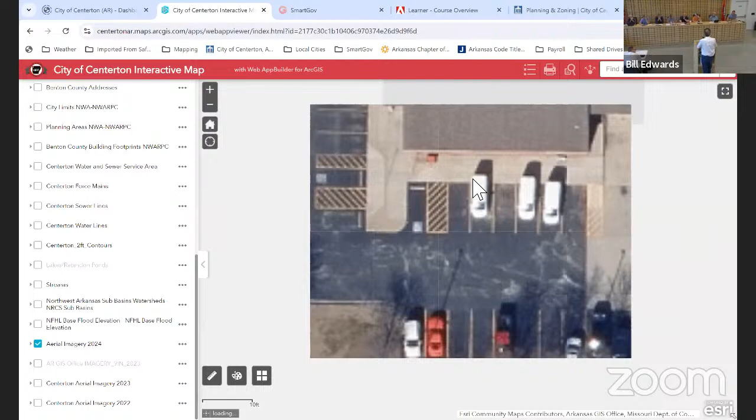So really on something like this, where we're expanding a building, the effects are parking, which they've satisfied, correct? Lighting, which they've satisfied as well. Technically on any other project it would need to come up to code. As far as lighting and parking, yes - the only thing we're really not doing is the island.

Technically, there's one long one there. I don't want to be in his defense, but technically there is a long one. I will say this - we came in early and met with the staff and they let us know early on. Several of the things they said yes to, and one of them they said no to. So that's kind of how they work, and they want to be a good neighbor. But just as the early comment was, I don't want to throw this out - they can do whatever they want to do.

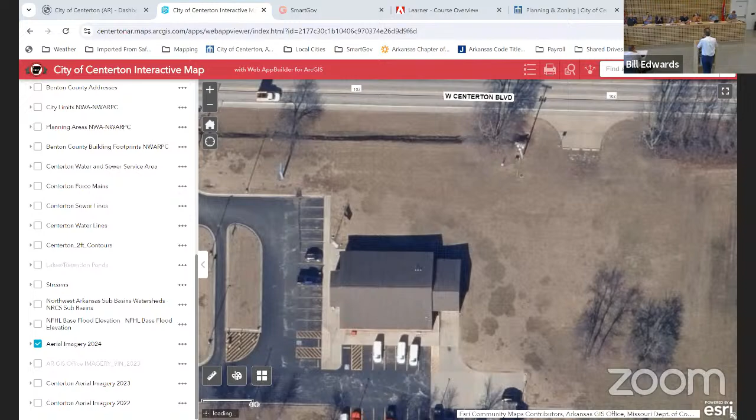Again, in an effort of consistency... I wanna ask for it, see if it gets there. You can do whatever you wanna do.

I'd like to get my mail next week. I just want to get the right mail is what I wanted to say. But, if there's nothing else, I would entertain a motion for the post office addition.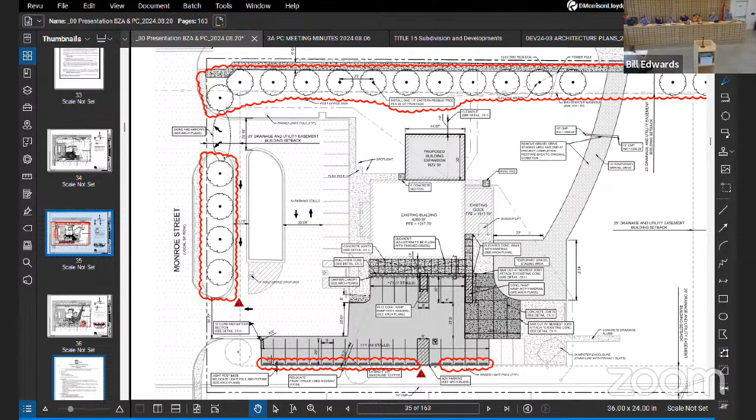Keeping us on track - next on the agenda, subdivision 2121, Meadow Ridge, request for extension of the preliminary approval. It's at the northwest corner of Keller and Seba. It's zoned R3, it's 43 acres.

What kind of landscape islands have you got for us tonight? You'll give us an approval, we'll put them every 50 feet. Oh, dang - just kidding, if my developer agrees to it. As long as you're gonna move Seba Road, a little more curve to it. Years ago in Cabot, we had a city engineer who thought it would be a good idea to slow down traffic by taking 55-gallon drums, filling them full of water, and staggering them down one of our busiest streets.

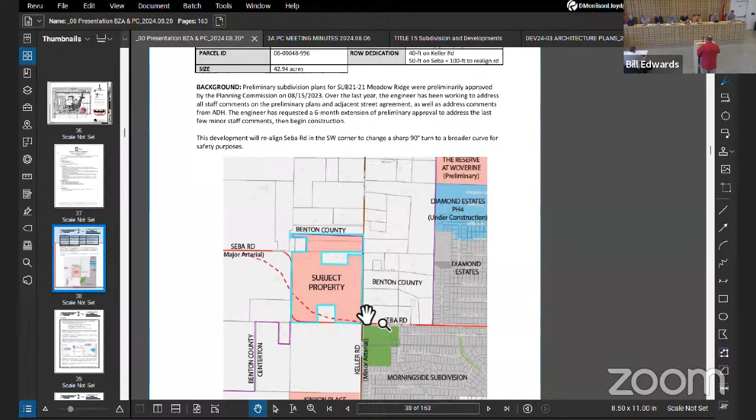He didn't keep his job very long. Worked out very well, did it? That becomes a challenge then. All right, what do you got, Tim?

We are back to get a 6-month extension on this approval that you gave us in August of last year. We had a couple of comments we've been going back and forth with staff on for an extended period of time.

Mainly the adjacent street agreement, and the reason it was so complex is because we are redefining Seba there in the southwest corner. Right now it's a 90-degree bend. We're taking that out and putting that in. So we had to come up with the logistics and an adjacent street agreement that would satisfy everyone, and I believe we've done that.

Honestly, we've got a grading permit. We're ready to get a pre-con and get started. So we're here tonight to get the 6-month extension, although I think a 1-month extension would probably be good enough.

I remember this coming. Yes, so the preliminary subdivision plans for Sub 2121 Meadow Ridge were preliminarily approved by the planning commission on August 15th of 2023. Over the last year, the engineer has been working to address all staff comments on the preliminary plans and adjacent street agreement, as well as address comments from ADH.

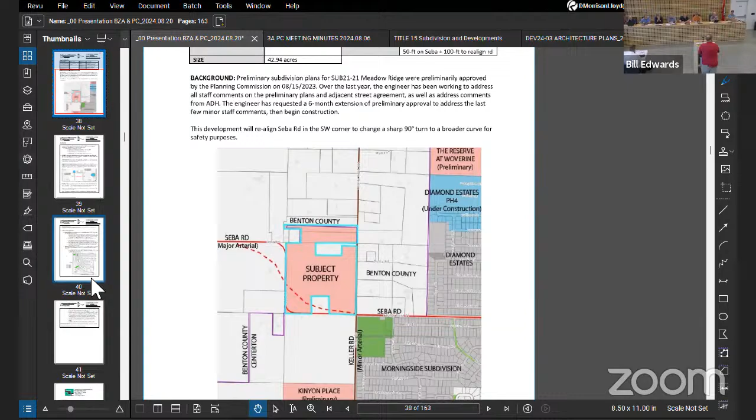The engineer has requested a 6-month extension of preliminary approval to address the last few minor staff comments, then begin construction. The most important thing to note, I think, the first time this came through, because there were so many unknowns, was Seba and how that was getting built, especially because you've got that little pocket of somebody else's property.

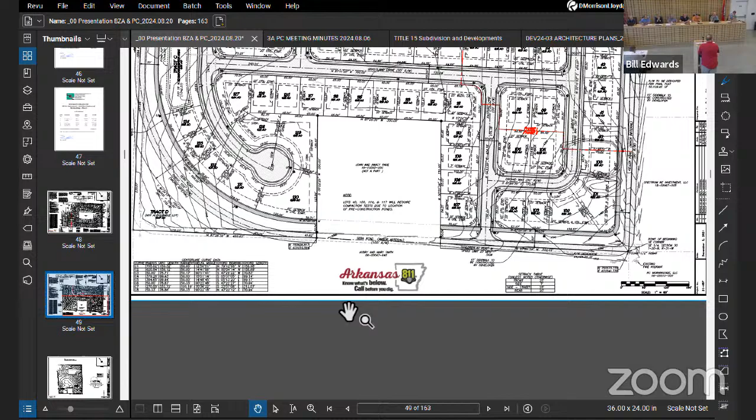That was really the only thing I wanted to highlight and clarify for you guys with this extension. I can go through the rest of the plans if you want. So this is on the corner of Keller Road and Seba. Seba Road is designated as a major arterial with a planned right-of-way of 100 feet per the master street plan. The section of Seba Road fronting this property is currently gravel and includes a sharp 90-degree turn.

So this subdivision will dedicate 50 feet of right-of-way along their frontage to meet the master street plan, except for in that corner where they'll be dedicating the full 100 feet to realign Seba Road. All improvements to Seba Road will take place with phase 2 of this subdivision. They'll do Keller Road with phase 1 and then Seba with phase 2.

So they'll do a 26-foot pavement with 2-foot gravel shoulders on either side, and there will be ditches on either side of the road. The city has agreed to cost share in the amount of $45,000 to pave a 330-foot section of Seba Road adjacent to the subdivision's frontage.

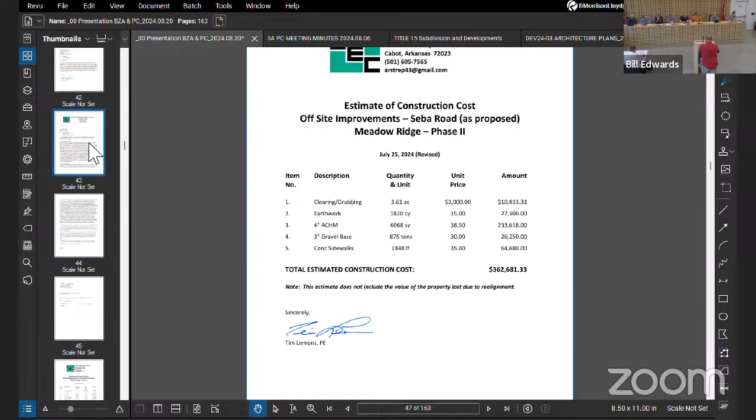The city is not cost sharing for the realignment of the curve on Seba Road, and have instead allowed the subdivision to install a modified street section and not pave to the end of their street frontage to the north end of Seba. This saves the developer approximately $80,000 and allows for a second realignment of Seba Road on that north curve. They will also install a 10-foot trail along the frontage of their property.

Street trees will be planted along Seba Road at a spacing of 1 tree per 25 linear feet of frontage, and streetlights will be installed at entrances and every 300 feet.

Okay, I do have one question. I believe in the ordinance it says every 25 to 40 feet. We did the 25 because that's what staff wanted, but what is the variation there in the ordinance, 25 to 40 feet? From trees?

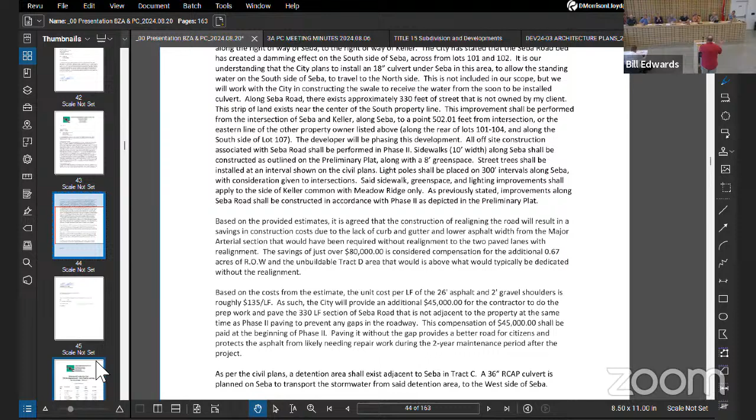I'm not sure the linear footage is actually in the ordinance part, it is now. The types of trees, I would think that would be species driven. We're fine with the 25, I would just, for my own... The 25 feet is typical, that's typically what you guys ask for subdivisions. But if you want something else, speak now.

In an effort of consistency, I think that's fine. Honestly, I didn't know that. I don't know why you would give a varying spacing other than the width or tree species, but I'm not sure you want huge monster trees next to the street either. I don't. What we picked is something I believe will work and look very attractive. I don't know where the 40 feet came from. I'll go back and look. It doesn't matter, I was just curious to see if anybody ever...

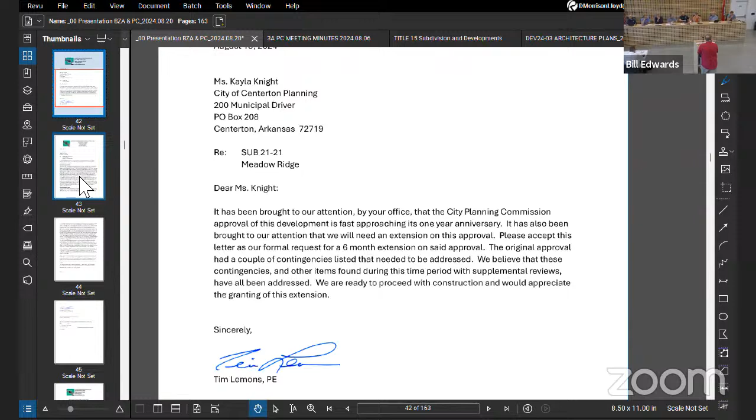Before we move on, can we go over the details of this road improvement? What's happening through the one parcel, the $45,000 that we're talking about? What's the section look like? It is going to be 26 feet of asphalt with gravel shoulders.

So they'll work the base on that. We're not gonna do anything on Seba, even though there's an entrance off of Seba Road, until phase 2, because we do that first stub of 200 feet. It's just gonna get beat up for the rest of construction because that's your main access point. So Keller will get done with phase 1, and all of Seba will be done with phase 2 afterward with that same section. And where it stops on the west end is about where the same transition is where we start cutting through.

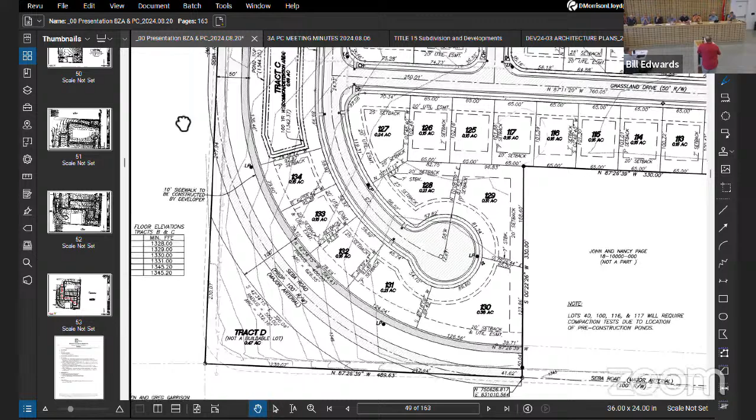So west side develops, it had that same relocation, and we got that cost share. Had we done the normal section, Seba was supposed to be a 5-lane, so 28 feet asphalt, curb and gutter around the whole length. With the added cost of the relocate and all that, it ends up being a little less expensive. Based on those calculations, that's how we got that 45,000. It ended up being closer to like 43,000, but 45,000 is a nice round number to pay to get that 330 feet done.

Do we have right of way on the west? Yes, with the tract split, we acquired right of way, not all of it, but we have a lot of it. I know on the southern half we do, but I don't think on the northern half. Down there in the southern half we do from the tract split, but not on the northern half, from about the entrance drive north, maybe even a little bit further south of that entrance drive.

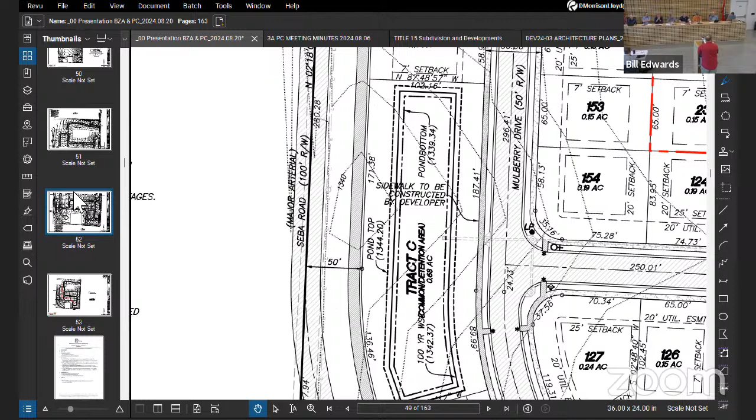You don't have right of way there? No, that's the county's. Is that an issue? No, not for paving and all that. So it's within the existing road section currently? Or it'll be off the existing where it is wider. One more thing, on the northeast corner in that other gap, are we doing kind of the same thing? We will, in phase 2. No, so that's not on his property at all.

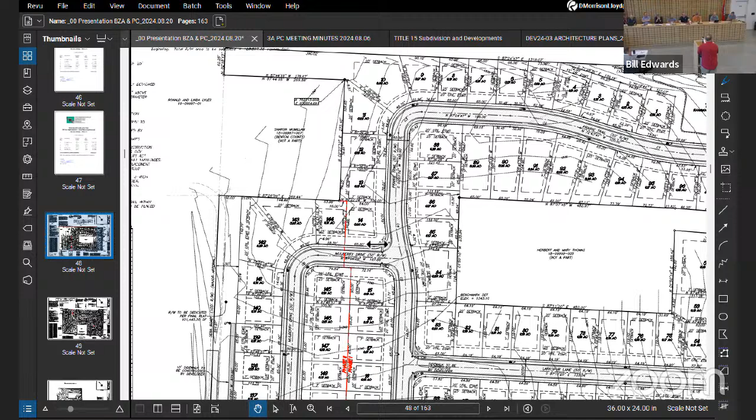So that property on the west that we don't have right of way on, it's in the county. When they go through, that's what we'd be looking at doing, to flatten that road so it's not that direct line. Where the pavement stops is where that same typical section we have south applies. That's not what you're talking about? No, I'm talking about the northeast corner, that little gap.

Are we doing a cost share there? No, they're just gonna, because looking at that one, they already know, for as short a section as that is, they'd have to come repair it anyway. It's cheaper for them just to pave it. I think it's 50 feet. I just wanted to make sure we had a consistent section through there.

But on neither of those sections will we have sidewalk. Sidewalk will terminate where it is. Yeah, I understand that. That's gonna clean up that corridor quite a bit.

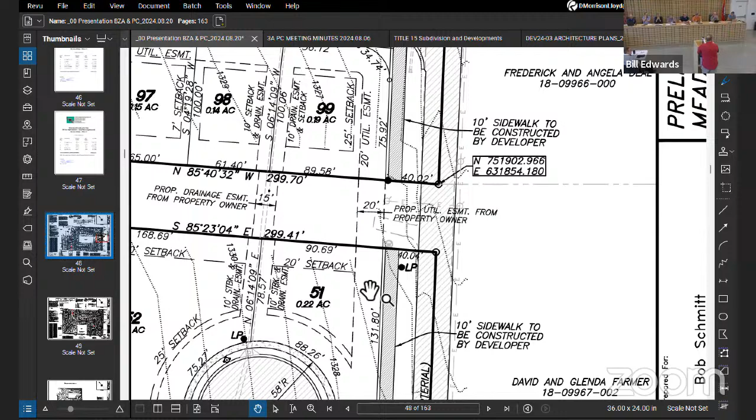And then Tim, tract D, what are the plans on that? Developer just wants to pay taxes on it? Zoom out, let me see what tract D is. I don't even remember, it's in the corner of that remainder tract, where the road comes through. I'm not sure what's gonna happen with that, to be honest. I guess they'll see if somebody at one of the adjacent property owners may want it. I don't know, we hadn't got- Sell it and put a billboard on it.

All right, look out, if there's nothing else, then I would entertain a motion for subdivision 21-21, request for extension of the preliminary approval for 6 months. Motion to approve subdivision 21-21, Meadow Ridge, request for extension of preliminary approval for 6 months. Second. Motion and second. Is anyone opposed? Thank you, Tim, good luck.

Thanks guys, appreciate it. Just put a bridge over that one parcel. Good. All right, our next planning commission meeting is 9/3. I think that's the day after Labor Day, so if you can't be here, make sure you let us know.